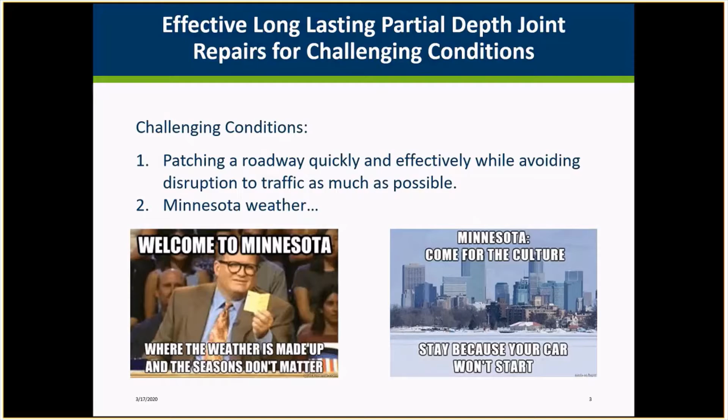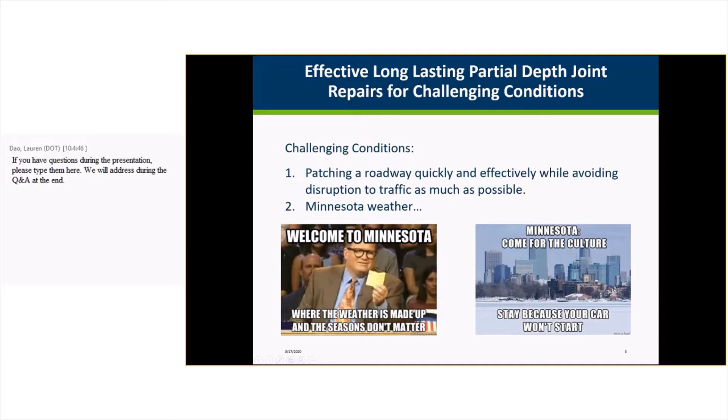Challenge number two, it's Minnesota. So the weather is unpredictable, so there's frequent and severe freeze-thaw cycles. And it also means harsh working conditions.

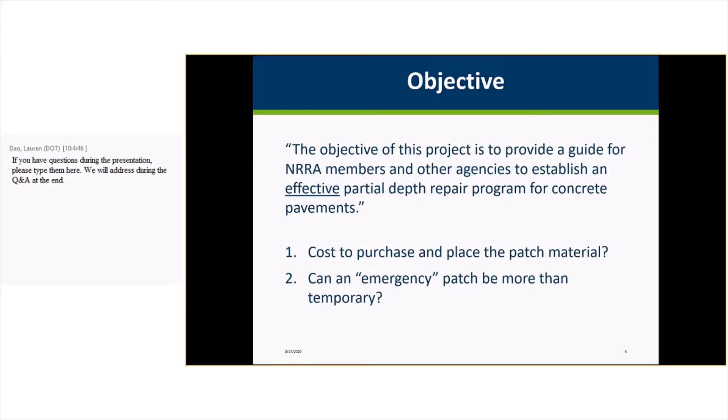So the objective for this project was to provide a guide for the NRRA members and other agencies to establish an effective partial depth repair program for concrete pavements. So to complete this objective, first of all is considering the cost to place the material. So what would be the cost of the actual patching material? Can we use equipment that is already on hand, or would it require new equipment? How long does it take to mix and place the patching materials? How long does it take to cure? So to complete this part of the objective, we documented the installation of the patches, and then we also collected material data sheets of each of the materials.

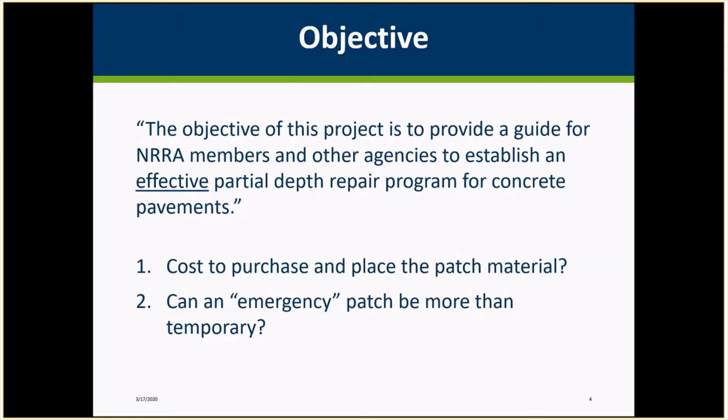And then the other way to complete this objective is to measure how long do the patches last. So to do this, we are documenting the performance of the patches over 3 years.

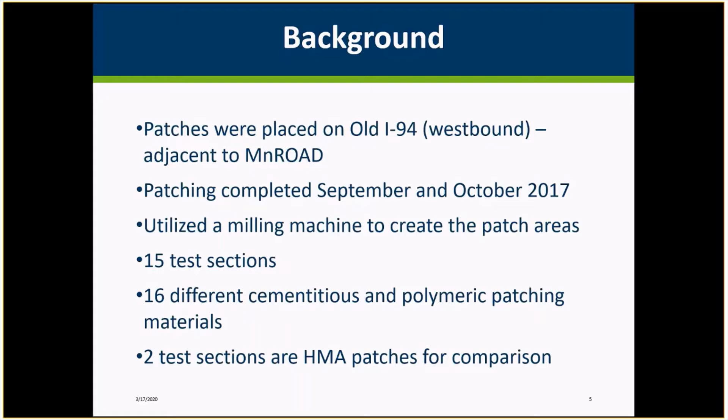So a little bit of background for this project. The patches were placed on the old I-94 westbound lane, so just adjacent to MnROAD. They were placed in late September and early October of 2017. And the distresses were created using a milling machine, which we were then going to patch. And we did this along 15 test sections on that old I-94 westbound lane. And we used 16 different cementitious and polymeric patching materials. And then on 2 of the test sections, we just did the typical HMA patching for comparison.

So this is a map of what types of distresses were created for each test section. So each section isn't laid out exactly the same, but each section has each of these distresses within it. So there's the center line, which is the gray, the mid-lane joints, which is the blue. We've got the center line joint, the green, the corner ones, which are yellow, and then the full length for

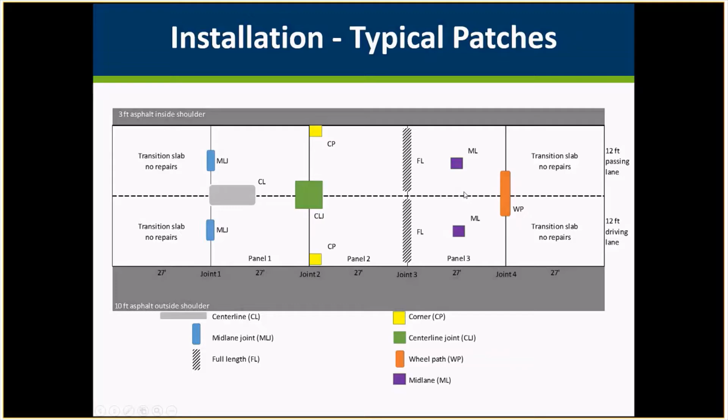each lane, that's the black and white, and then the mid lane is purple, which we realized this might not fit into the title of joint patching, but kind of another experiment within an experiment, I guess. Seeing how the materials do when it's not in a joint versus on a joint. And then lastly, the wheel path.

So for our documentation during installation, we tried to keep track of a lot of different things at once. So noting how the material is packaged. Does it come in bulk, or does it come in smaller packaging as well? How it would need to be stored. What type of equipment would be required for mixing the material and installing the material and curing the material, and then the procedure for mixing it and installing it, and then curing time. So it's kind of a lot of things that all got collected as these patches are being installed.

So the plan right now is to create an installation matrix for the final report, so that we can compare each of the products based on each of these topics, which I think will be important when choosing products, so that if there's a favorite, or if on a case-by-case basis you might need to use a different product, there might be one that would be better for we need the road to be open as soon as possible. So we just need something that has a really easy to install, really fast curing time.

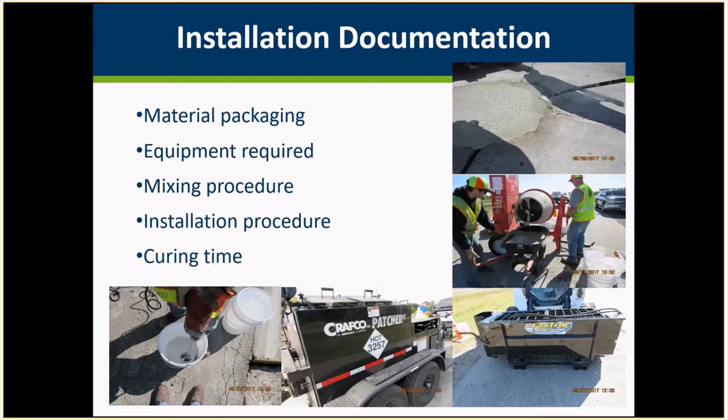While another one might be better for, maybe you've got just one guy that's able to go out there and do the patch. So something that's easy for just one person to do. So the hope is that we can create a matrix to kind of help make these decisions.

So every research project, you plan it out, you think it's just going to go perfectly, but there's always a couple of inconsistencies. So just wanted to list a couple of them here. So the first one, during the installation, the milling process ended up being a little bit more aggressive than intended. So the distresses were a little bit larger and deeper than what was originally imagined, I guess. So because the distresses were so large, there actually ended up being sort of a lack of material.

So you may have noticed I said there was 15 test sections. 2 of those were hot mix asphalt, so that means there was 13 test sections with 16 different materials. So because of that lack of material, some of these test sections actually were cut in half, the driving lane versus the passing lane, so that we could use product on each side before running out of material.

And also because they were some of the larger patch areas, like the full length that goes across both the driving and passing lane, because it was already such a large distress, the milling process may have cut it deeper in some areas to the point where in a real life scenario, this may have been considered for a full depth repair instead of just a partial depth repair.

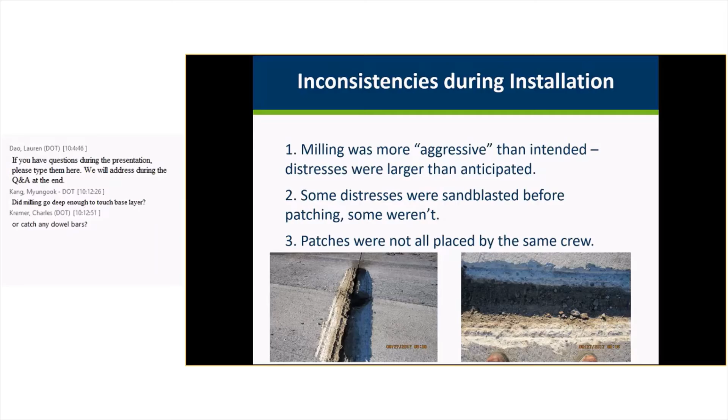And then the last inconsistency during installation, the patches were not all placed by the same crew. So some of the patches were placed with the help of the product vendors, especially ones that used a little bit of different equipment, had a little different process than just a typical concrete or hot mix asphalt patch. So some of them had the help of the product vendors.

Some of them were placed by the MnDOT district crew, and then there were some that actually had some of the NRRA and MnROAD personnel helping out. So it's not necessarily that it could affect anything, it's just an inconsistency. Figured it should be noted.

So after the installation was complete, we actually did a literature review. So we just kind of went through some other previous research projects that have been done on patching concrete pavements and partial depth repairs. And some of the things we were looking for was just what are the different types of materials that have been used for the cementitious, polymeric, and bituminous patches.

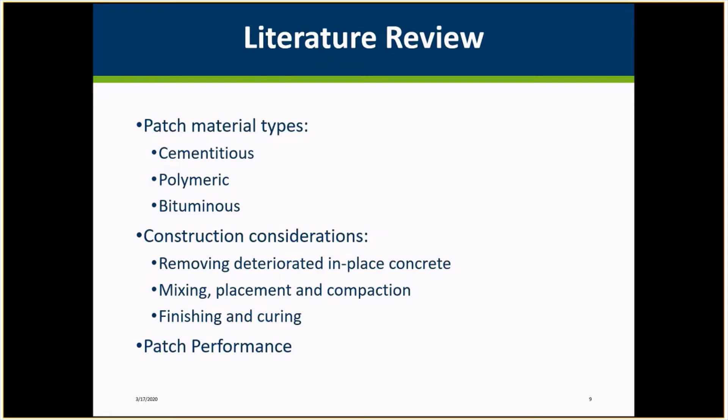And then also construction considerations: the process of removing the deteriorated in-place concrete, processes for mixing, the placement, compaction of the patch material, and then also the finishing and curing. And finally, we also were looking at the different patch performances.

So our conclusions from this literature review were partial depth repairs work well for certain spalling distresses that are within the upper 1/3 to 1/2 of a slab thickness. And when I say certain spalling distresses, it's spalling distresses except for those caused by dowel bar misalignment, working cracks that have been caused by shrinkage, fatigue, or foundation movement, durability cracking, and material-related problems such as ASR.

We also found that construction-related factors can result in premature failures, which is not surprising. And then a well-constructed partial depth repair can last 3 to 10 years or more. So that's assuming that it's been mixed properly, placed properly, the distress was properly cleaned, cleared, debris removed. So if all of that was done properly, they were showing that these repairs could last up to 10 years.

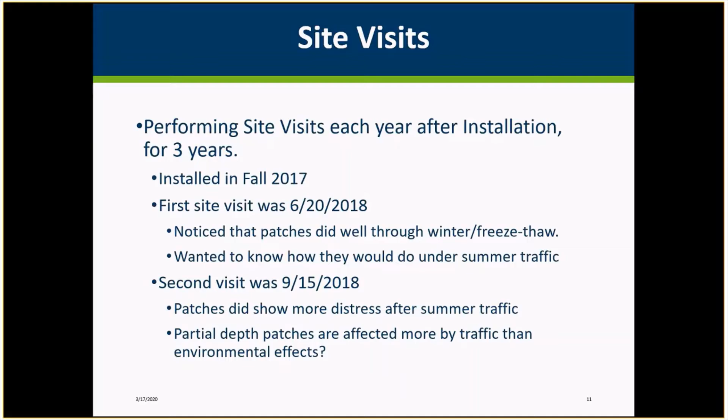So during each of our site visits, we were taking photos. We took a lot of photos during the installation of the patches. However, there weren't that many photos of what the patches looked like immediately after installation. And then during these two first site visits in 2018, photos were only taken of the patches that were showing distress. So if we don't have a photo, that actually means that the patch is doing well.

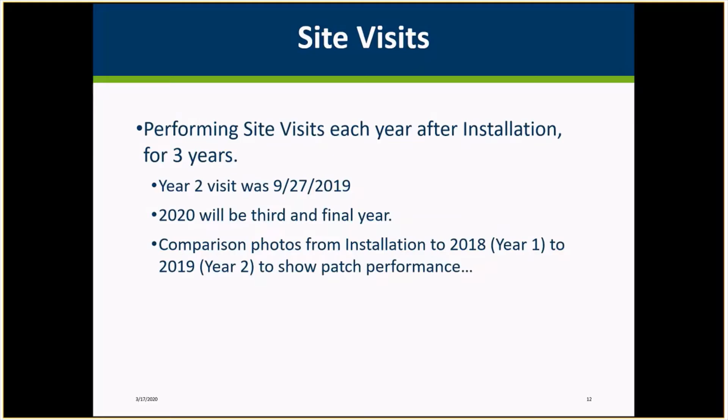So then continuing on, year 2, we did a site visit in September of 2019. And during this site visit, we decided we needed to start taking photos of every single patch. So starting 2019, we have a photo of every single patch. And 2020 will be the third and final year, and we will do the same thing, taking photos of every single patch to really show that comparison of how the material is doing over the years.

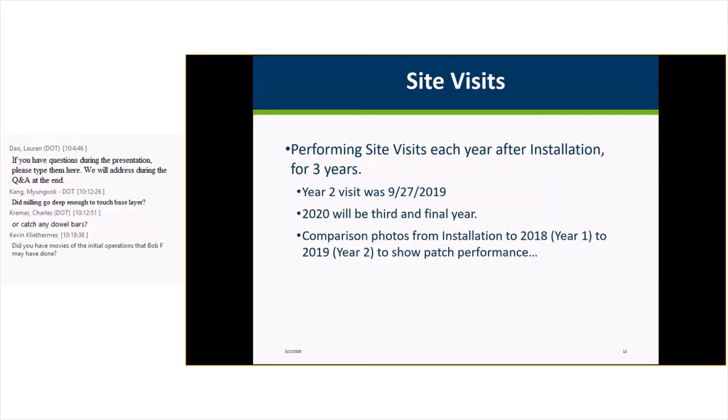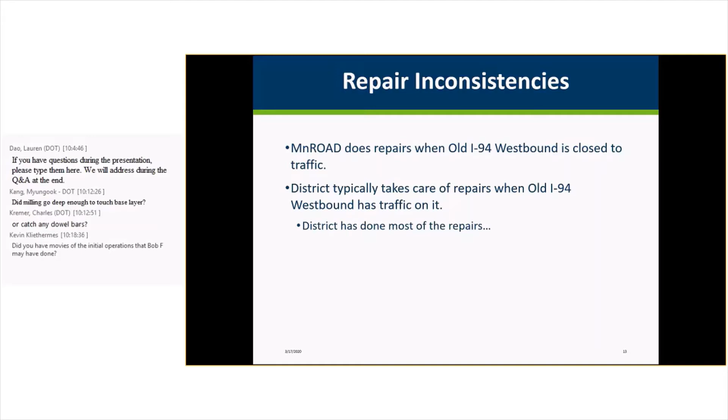So yeah, we have a couple of photos from installation. We have photos from the first year and photos from the second year right now. We still need to do our site visit for 2020, which will be done this summer. So a couple more inconsistencies. Over these 3 years, as these patches might fail, we need to be repairing these so that we can continue to have traffic on the roadway.

So MnROAD does repairs when Old 94 westbound is closed to traffic. They will do their own repairs, and that way they can keep track of what's going on with each of these patches. However, when the roadway is open to traffic, it's my understanding that the district takes care of the repairs. So as I had stated before, most of the distresses seem to be popping up when there is traffic on the roadway, which means that the district ends up doing a lot of the repairs out there.

So we are still gathering that data about when repairs were done on some of these patch areas. So we went back out in 2019 and realized that some of these patches have been repaired, but we don't necessarily know when that patch failed.

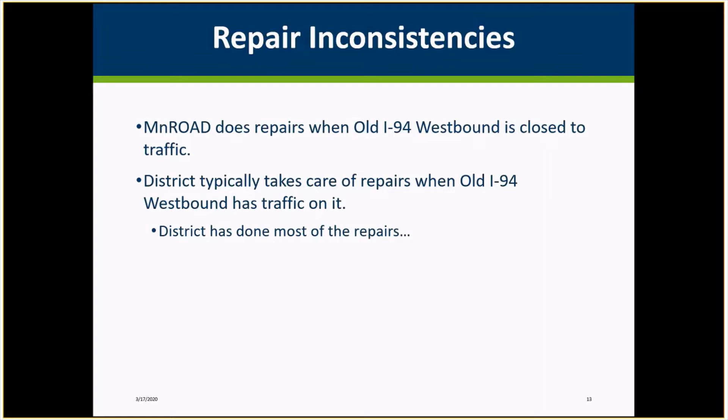So the scale is just based on whether the original patch still exists, and if so, what condition is it in? So we only were doing the condition rating for the cementitious and polymeric products. We didn't review the hot mix asphalt patches on a rating scale. We were just using those for comparison. So we used the MnDOT Pavement Distress Identification Manual for concrete pavements to define our distresses within the patches.

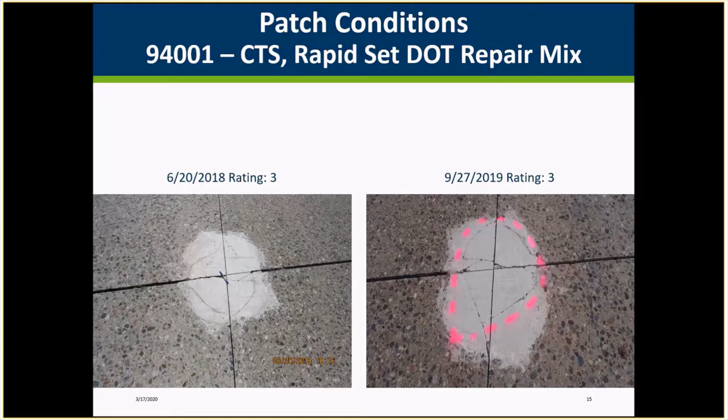And then the second photo from September of 2019, you can see those same cracks are there. The pink paint, Gordy went out and noted debonding within each of the patches out here. So the pink paint would be representing if the patch has debonded. So there is debonding here. But again, the patch is 100% in place. It hasn't had to be repaired, so it still gets a rating of 3.

The second one, SpecChem RepCon 928. This one we actually got a photo of the patch immediately after it was installed in 2017, so that would be where it was considered a 4. However, I did not get a photo of this exact same patch area in 2018, which would be a good sign because that means that it was doing well. But in June of 2018, here we have a different patch in the same test section where a little bit of cracking has developed. So it got a rating of 3.

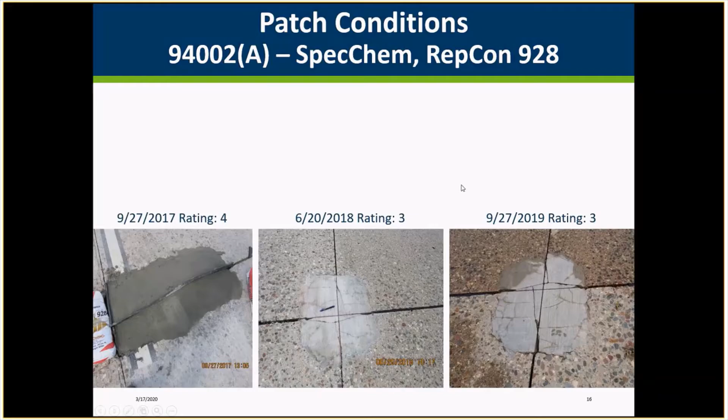And then again, in September of 2019, we can see that it still has that cracking, but no debonding, and the entire patch is still there. So it still has a rating of 3.

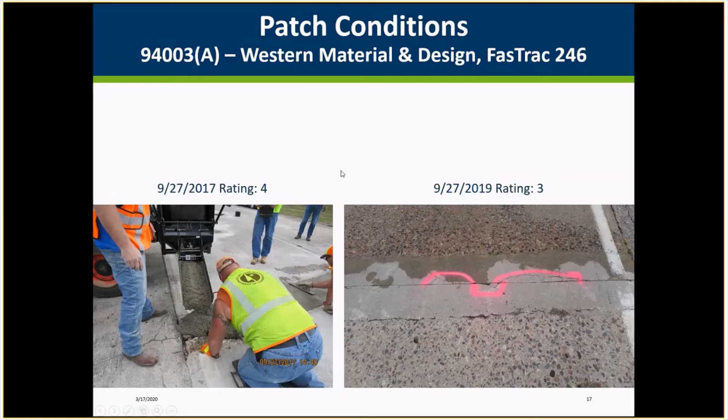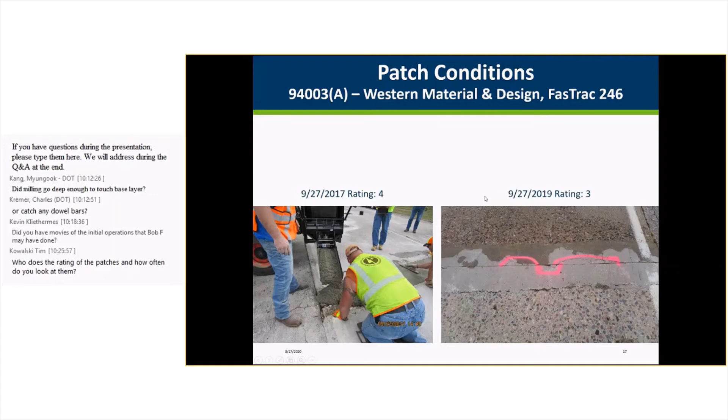The third one, Western Material and Design FasTrac 246. Again, here's a photo from 2017 being installed. So after it was installed, it got a rating of 4. 2018, no photo, which means it was doing well, no signs of distress, would have had a rating of 4. And then in September of 2019, we can see there's a couple of cracks and a little bit of debonding right at the joint, so a rating of 3.

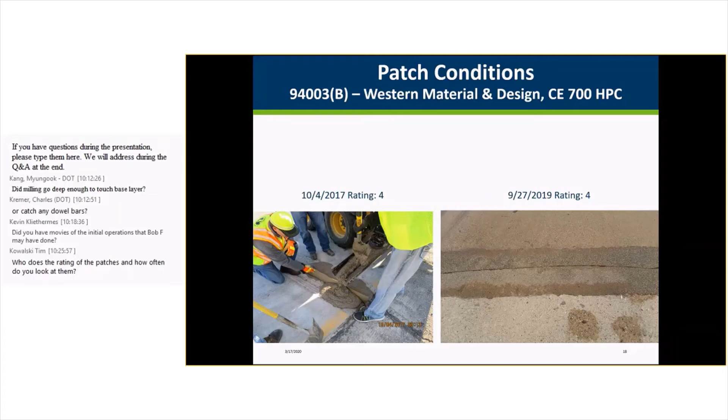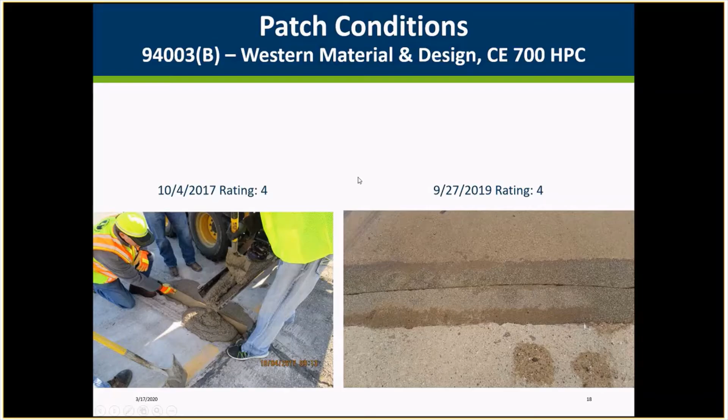Next one, Western Material and Design, the CE 700 HPC. Again, a photo from installation date. So after it was installed, it got a rating of 4. No photo from 2018, which means it was holding up really well. And then the second photo you can see from 2019, there's still no distress, no signs of distress, no debonding. It's holding up really well, so it still has a rating of 4.

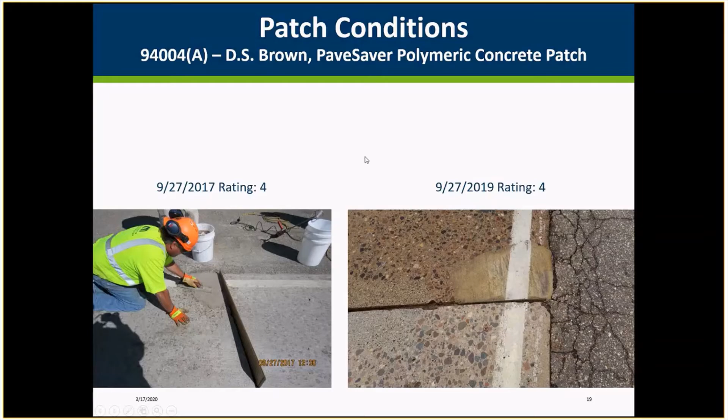Next one, D.S. Brown PaveSaver Polymeric Concrete Patch. Again, installation date in 2017, it had a rating of 4. No photo in 2018, which is good. And in September of 2019, again, no signs of distress. So it also got a rating of 4.

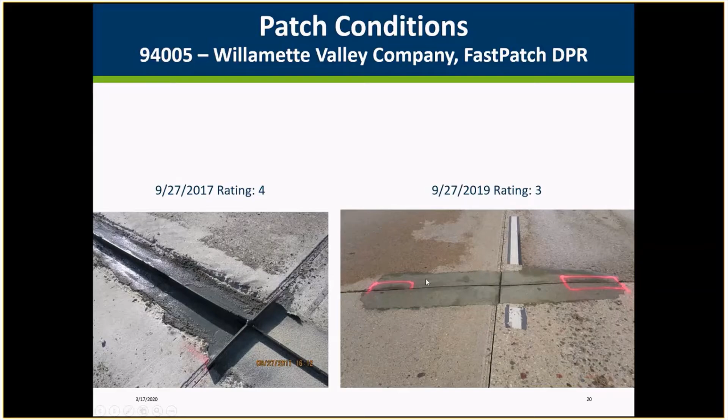The Willamette Valley Company Fast Patch DPR, again, installation, got a 4. No photo in 2018, which is good. And then in September of 2019, there was just a little bit of cracking right at the joints, and then a little bit of debonding as well. But the entire patch is still in place, so it got a 3.

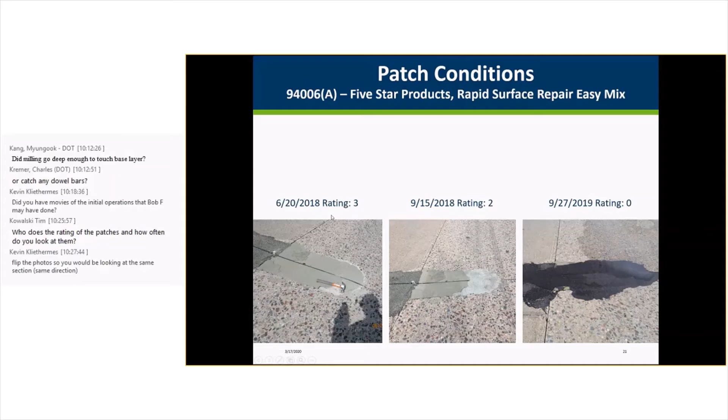5-star products, Rapid Surface Repair Easy Mix. So this first photo here is from June of 2018. So this would have been right after these patches had gone through their first freeze-thaw cycle. And you can see that there's just a little bit of material missing along the edge here. So it got a rating of 3.

So then when we went back out in September of 2018, so still that first year, you can see that the edge of the patch here is really where the traffic was hitting it, and it ended up deteriorating quite a bit more. So it actually got repaired between June and September. So it wasn't quite 50% of the patch that was lost, so it got a rating of 2 at the end of 2018.

And then when we returned again in September of 2019, the entire patch was repaired with some hot mix asphalt there. So at that point, we considered the patch to be failed.

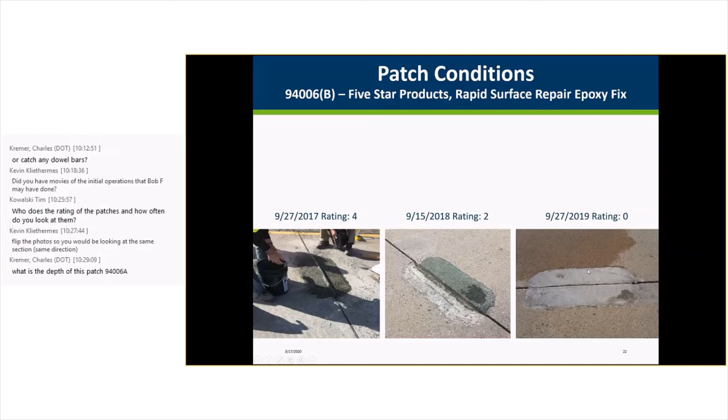Another 5-star products, Rapid Surface Repair Epoxy Fix. So this first photo is from the installation date. And then in September of 2018, you can see half of the patch ended up popping right out, but half of it is still in great shape. So we gave that one a 2. And then when we returned in September of 2019, the entire patch had to be replaced, so that one was considered failed.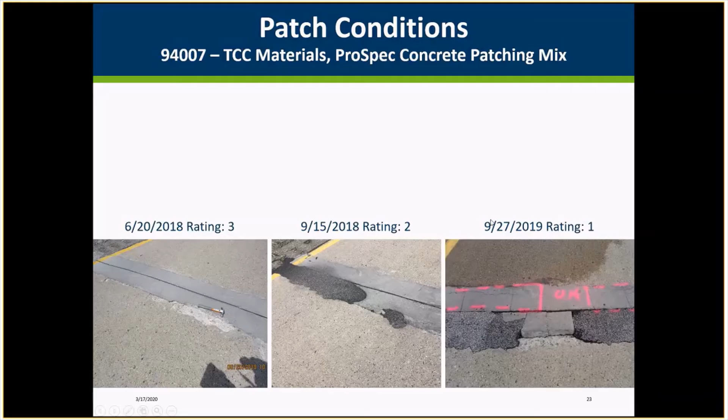Next one, TCC Materials ProSpec Concrete Patching Mix. So here again in June of 2018, there was just a little bit of material that was missing from the edge here, so it got a 3. When we returned in September of 2018, there was quite a bit more material that had popped out there, so we did have to do some repairs between June and September of 2018.

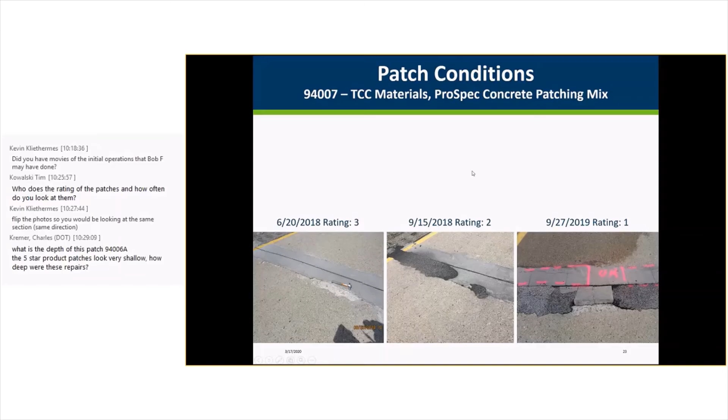And then when we returned in September of 2019, more material had broken out. There was quite a bit more cracking and some debonding. So this one actually had over 50% of the patch that had to be repaired, so it went down to a 1.

The next one, Aqua Patch. So this one we actually got quite a few photos here. So this is all kind of the same area, just different angles. So this first photo is the day after it was installed in 2017. And then you can see in June of 2018, there's a little bit missing from the edges here, and there's some cracking, but less than 50% of it is missing, so it got a 2.

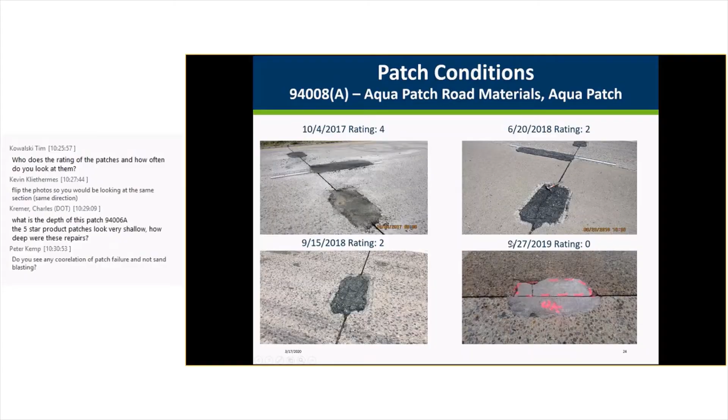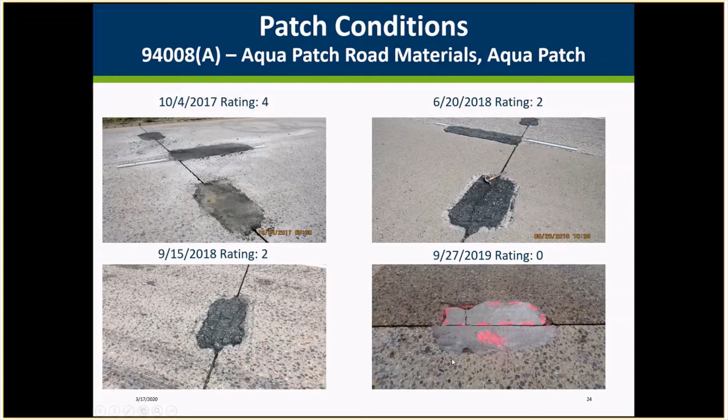Again, September of 2018, when we returned, you can see there's a bit more cracking, a bit more material is missing, but still more than 50% of the patch is in place, so it still got a rating of 2. And when we returned in September of 2019, the entire patch had been replaced. So that one was considered failed at that point.

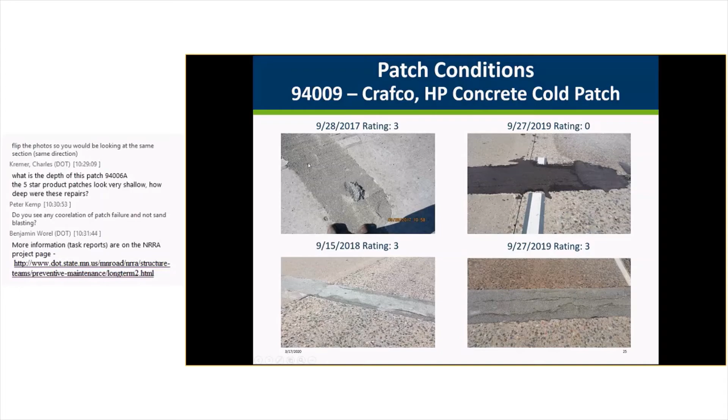Next, Crafco HP Concrete Cold Patch. This one I actually have 2 examples. This product is a little bit different. The first photo here is from 2017, the day after it was installed. So you can see there was a little bit of material that got dislodged there. You can also see there's tire tracks in it, footprints. So it really looks like this patch maybe didn't get the compaction that it required.

And it also looks, I mean, it's already kind of a little bit depressed, so it could have been an issue just of lack of material that was available to put in this patch. So then when we returned in 2019, the entire patch had been repaired with hot mix asphalt. However, the cold patch is still in place, it's just that it was depressed to the point where it needed to be filled in more. So that is why there's the hot mix asphalt over it, just to fill in that depression. So that's why I gave a second example here.

So the second example's first photos are from 2018. So you can see that they had that similar issue with compaction, where they put a second layer of that cold patch on top during the installation. So you can kind of see that there, but otherwise it's really holding up.

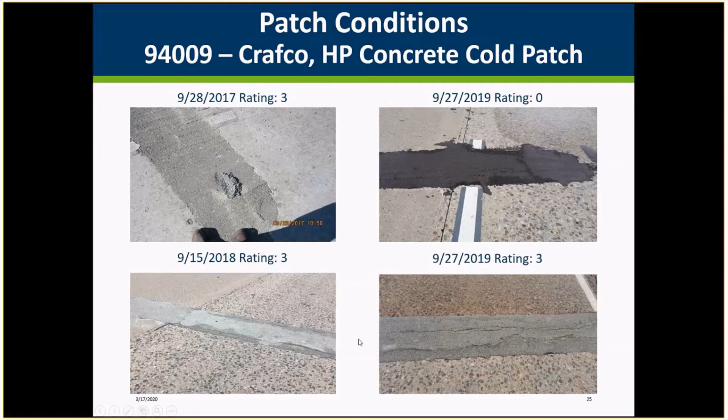And then when we returned in September of 2019, you can still see there's that layering there, but this section, since it got a second layer, hasn't depressed quite as much. There's a little bit of cracking down the middle where the joint would be, but other than that, it's holding up pretty well.

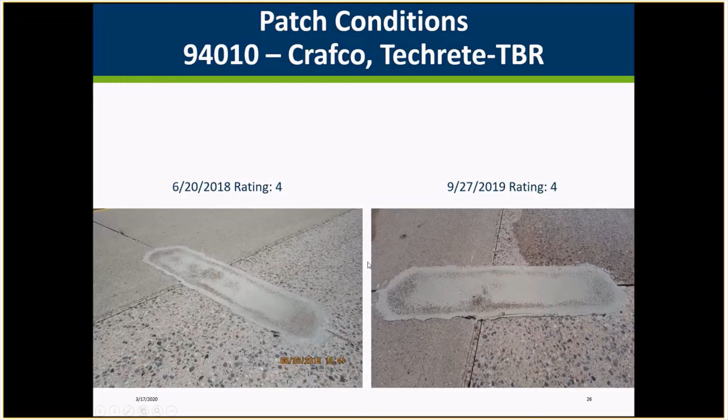The next one, Crafco Techrete-TBR. So this first photo was from June of 2018. There were no signs of distress in 2018. And when we returned in September of 2019, it honestly looked almost exactly the same. So that's definitely good.

The next one was TCC Materials, the 3U18 Modified. So this one, it's a common patch mix that MnDOT uses, and they modify this mix by adding 2 different admixtures. One is an accelerator and one is a water reducer.

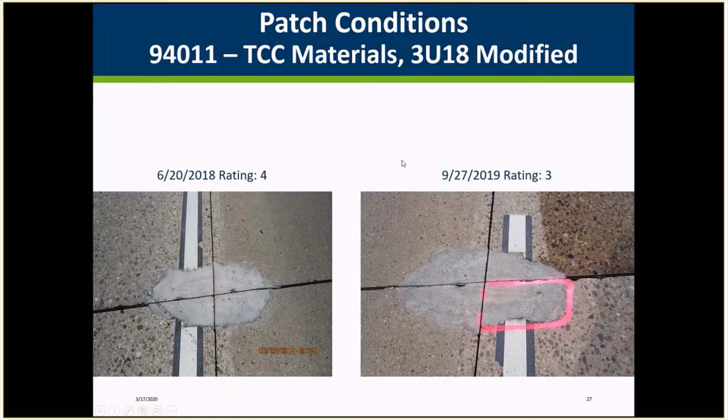So this first photo from 2018, it's in pretty good condition here. And then in September of 19, there's just a little bit of cracking and a little bit of debonding in that one corner.

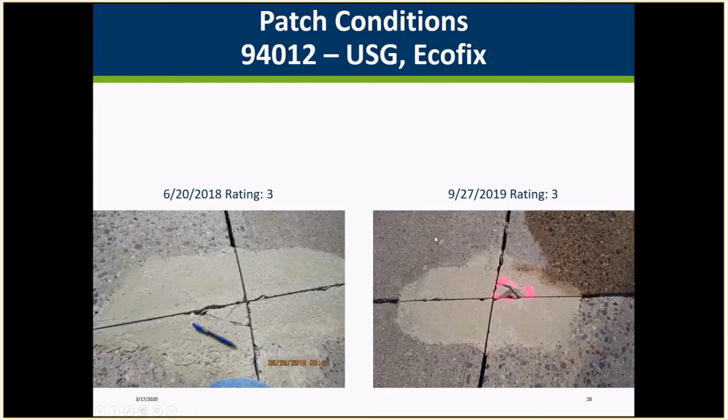The next one was USG EcoFix. Again, June of 2018. You can see there's just a little crack in the corner here. And then it's September of 2019. That is still the only distress that is showing up right now. So that same crack in the corner, which has also debonded.

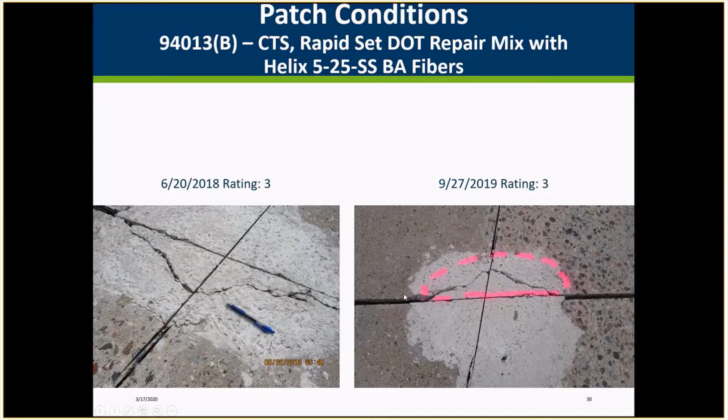So that was on, I believe, the driving side, and then the passing lane side we used stainless steel fibers, so comparing the two different fibers. So in June of 2018, this one again, there was some cracking that had developed, but when we returned in September of 2019, it was just still that same crack that's there, but otherwise the patch is still holding up pretty well.

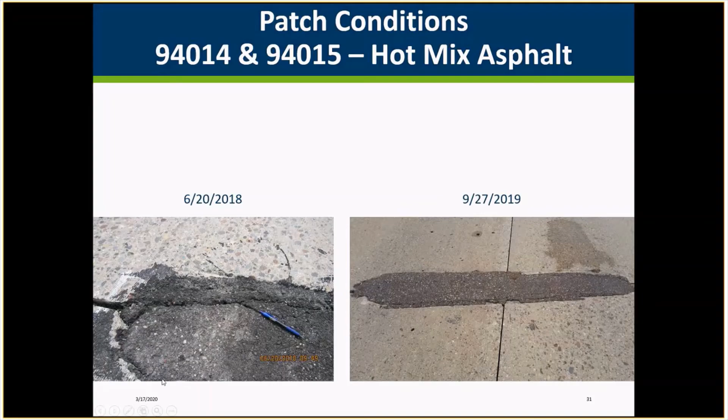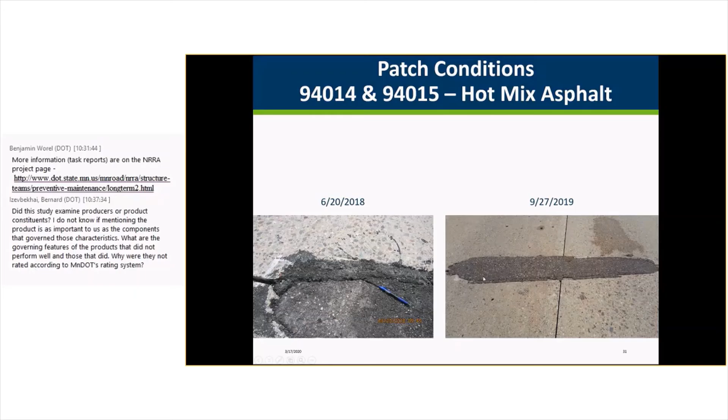And then, as I had mentioned, the last two test sections were just hot mix asphalt. And this area, there's been quite a few repairs. We still need to track down all the dates that these patches have been repaired over the last few years. So this photo from June of 2018, we're pretty sure this is actually material that had been replaced since installation in 2017. And then this photo from September of 2019, there's definitely some cracking along the edges here, and it's possible that this has been replaced since the installation.

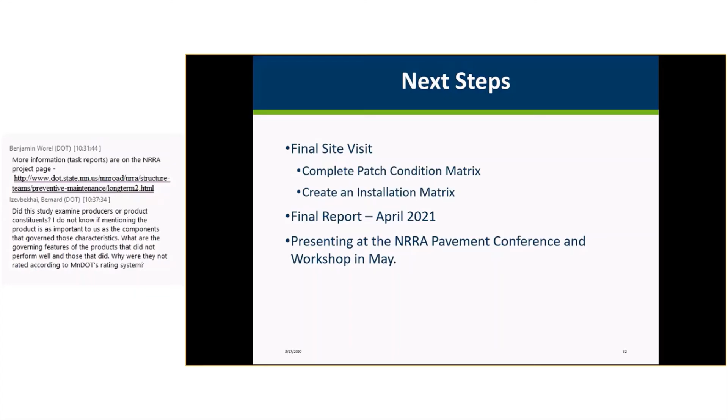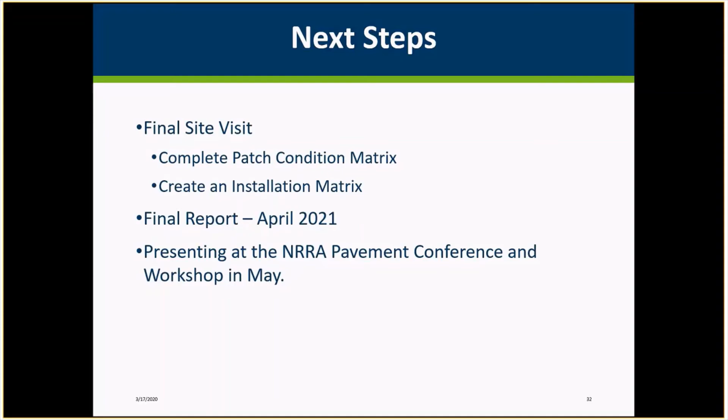So next steps. We'll have the final site visit this year. After that final site visit, we will complete a patch condition matrix with that rating scale that we developed, and then also create an installation matrix for comparing the installation process for each of the different products. A final report is to be completed by April of next year, and I will be presenting on this again at the pavement workshop in May if all goes as planned.

So yeah, does anyone have any questions? We do have a few questions in the comment box here. All right.

Did milling go deep enough to touch the base layer? As far as I know, no. It did not extend beyond the concrete pavement. However, it is possible that it went below the half of the depth of the slab. Okay. And then someone followed up with, or catch any dowel bars. I don't know. I don't think so. Okay.

Did you have any movies of the initial operations that Bob F. may have done? So like any video recording, maybe? I personally do not have any videos. I can definitely look around and see if there are any. Yeah, there may be some that we have on our network files here. I know we do have a lot of recordings from April of 2017. I'm not sure if that's related to this project or not. Okay. So we can look into that further. Yeah, maybe we could post some of those up on the website for this project.

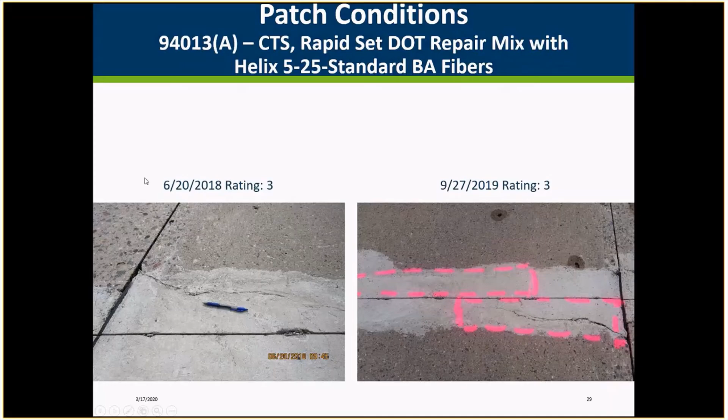And someone had a specific question about the depth of the patch, and they were referring to patch 94006A. Sure, let's take a look. So you're asking what is the depth of the patch. I did not measure the depth of the patch, but I know the goal was to stay within that upper 1/3 to 1/2 of the total slab thickness. So it would have been a couple inches.

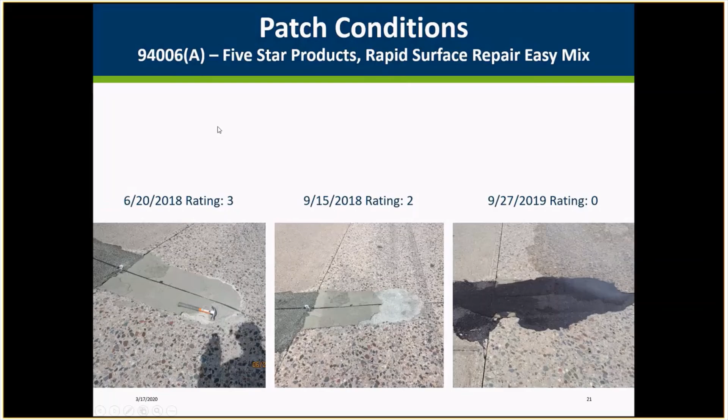Okay. And someone has another similar question. The Five Star Products patches look very shallow. How deep were these repairs? Well, let me go back to the very first photo of the installation here. So you can see the way they were milled, it tapers a little bit. So right along the edge of the patches there, it is pretty thin. It isn't just a right angle going straight down. You can see it tapers down. So each of the distress areas looked like this. Okay.

And we have another question here. Do you see any correlation of patch failure and not sandblasting? Yes, that actually is something that we've noticed. So we did take note of exactly which patches got sandblasted and which ones didn't. And there are a couple test cells where it was the same product being used throughout the test cell, but sandblasting was only done in the driving lane and not the passing lane. And there does seem to be a correlation: where there was sandblasting, the patches seem to be doing better than the areas where it was not sandblasted.

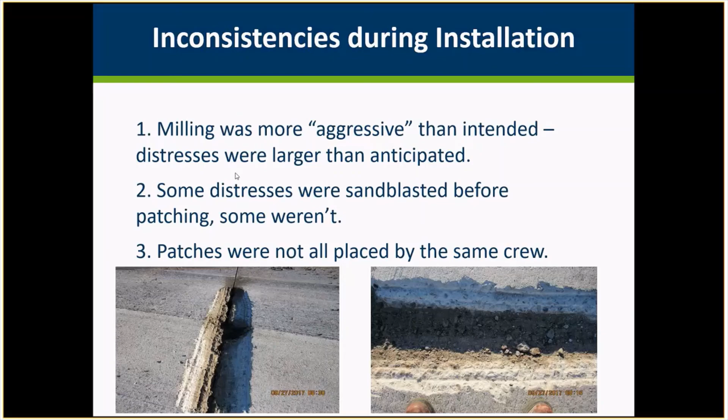Okay. Yeah, so as far as the distresses go, I did try to stick to what MnDOT identifies as distresses. We did use a 0 to 4 rating scale here, but at the same time, understanding that we're rating just the patches themselves and not the entire roadway, which MnDOT would typically do. So trying to keep it focused on each of the different patches instead of considering the full length of each test section.

And I guess, Heidi, this is Ben Worel speaking. Bernard, the TAP got together and talked about the rating scale that we'd use for just the patches. Again, a lot of the rating systems for the state deal with the whole concrete panel. So for these patches, we just had a consistent method of doing it. And each state does it a little different. So in a lot of ways, doing it to MnDOT standard is not necessarily the all true correct way of doing it anyways. So, as Heidi stated, there's the rating scale we used, and that really has helped us separate the different products and methods that were used.

So, I think if you look at the final report, this was just an overview. There's just a few pictures we could look at in this short time frame, but there's a lot more pictures and things like that on that NRRA project page.